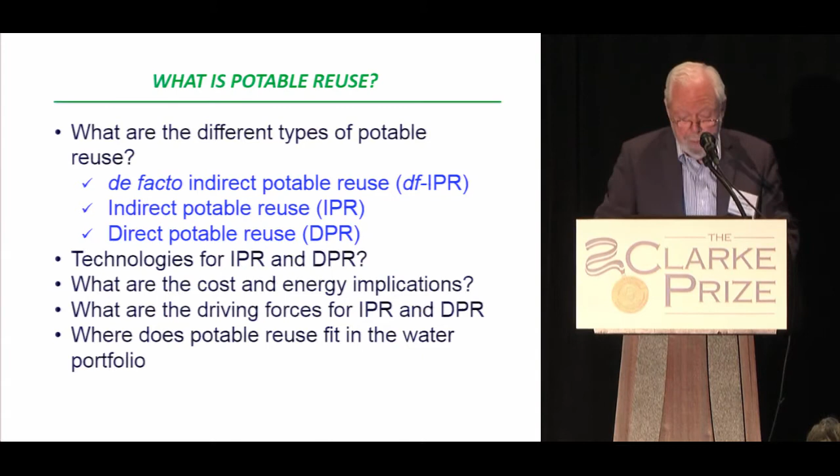And right now, there are really 3 different types of potable reuse: de facto indirect potable reuse, indirect potable reuse, and direct. And then we'll talk a little about the technologies, some energy and cost implications, and some driving forces. Now, indirect potable reuse really is this diagram, and Jeff put it up earlier.

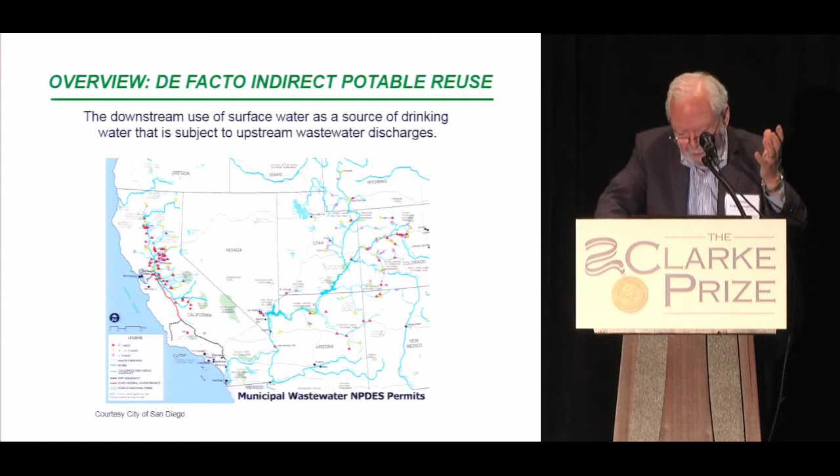And when you think about it, he set the tone for the next 100 years. He absolutely set the tone for the next 100 years. And as you think about drought and reduced flows in rivers, the wastewater is going to become a much larger fraction. And the point is that when the Clean Water Act was passed, it was not passed for this problem, it was to make streams swimmable and fishable. And so we are still suffering from this kind of an approach from 100 years ago.

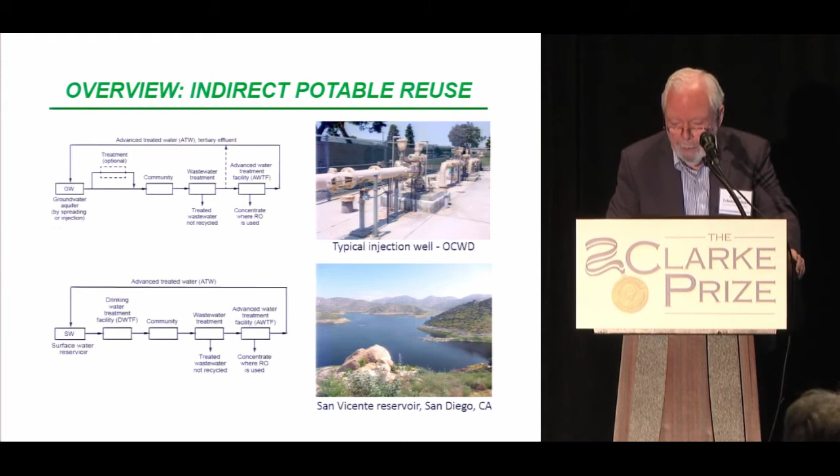So when we talk about direct potable reuse, what are we talking about? We're talking about two types of direct potable reuse. In the first one, advanced treated water is introduced either into a small reservoir or mixing chamber or at the front end of a water treatment plant. And so the concept there is that we're going to introduce it at the front end.

The second type, which people often mistake and want to call tap to tap or pipe to pipe, is one in which the advanced treatment facility is permitted as a drinking water plant. And you see, at this point, no one knows how to do that. In other words, if you have a facility that's producing advanced water and it's also going to produce drinking water, do you separate it by distance? Do you separate it by process? What is it you do? And we really don't know this.

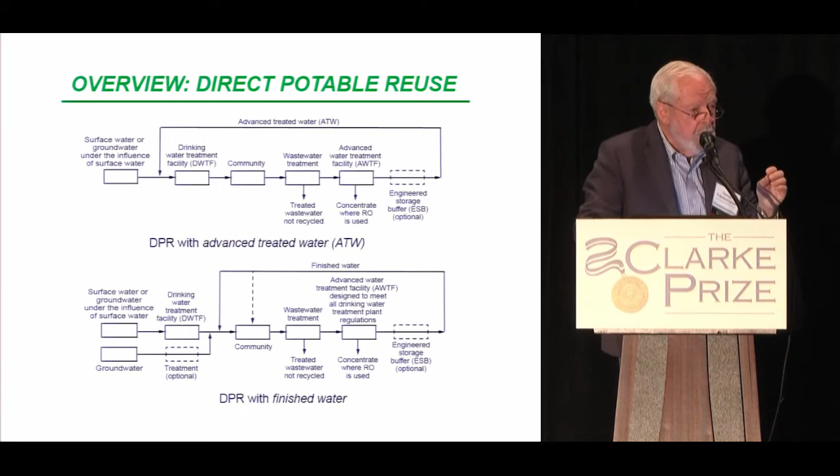And so really the focus of our efforts in the panel were on the upper part. That is where we take advanced treated water and we introduce it at the front end of a water treatment facility. Examples of DPR, Big Spring was mentioned, and Windhoek, Namibia is an example of direct pipe to pipe.

Now, the question that Karen brought up, and it really is a very important one, when you put water into a surface water reservoir, at what volume of surface water reservoir does it become direct potable reuse? In other words, how do you compute that? What do you do? In a proposal that the city of San Diego is submitting, they're talking about additional treatment, both with ozone BAC and disinfection with free chlorine. But again, these are issues that all of you are going to have to deal with.

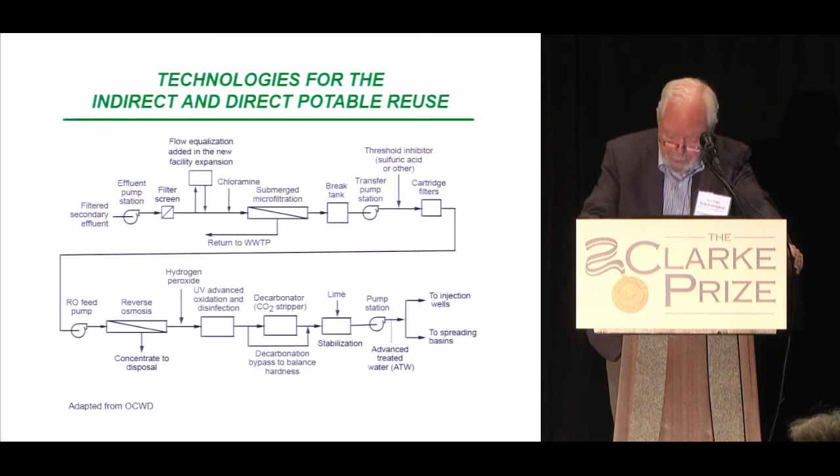If we look at technologies, probably the gold standard for advanced treated water is the Orange County Water District system. And it was put in based on a lot of experimentation over a number of years. And we have submerged microfiltration, reverse osmosis, advanced oxidation, water conditioning. And so there's a lot of concern about how can we do away with reverse osmosis, especially for inland locations. And a lot of work is going on there, and in the next 10 years, you will see a variety of new processes come online, which are really rather dramatic.

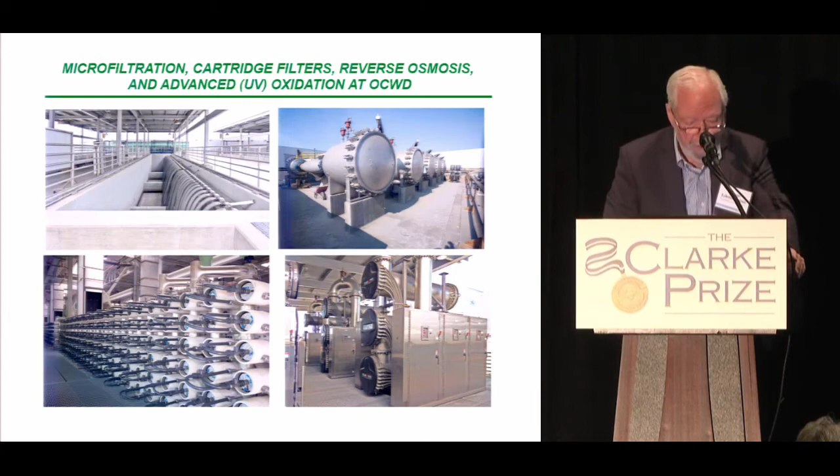If we just look at the facilities themselves, we have in the upper left the microfiltration. We have the cartridge filters on the upper right. Now that's an interesting story. Why do you need cartridge filters if you have microfiltration? Well, the reason is that the chemicals that you buy, the purity is not high enough, and if you don't filter out contaminants, you will damage your membranes. So it's an interesting conundrum, because if you buy pure lab-grade chemicals, the costs are really rather prohibitive. Obviously, we have reverse osmosis and advanced oxidation.

Let's take a look at energy. And we can compare advanced water treatment with, let's say, the energy required to transport water from Northern California. And the amount required to transport the water is larger by a factor of 3, roughly. So all of a sudden, from being a kind of stepchild, this system has become front and center, and it has become cost effective and will become more cost effective in the future.

What are some of the driving forces? Well, from my perspective, the most important one is that water is significantly undervalued now and is going to increase by at least a factor of 3 in the next 5 years. And I see this trend across the country. There are obviously other forces, and we don't need to go into those, but I just wanted to highlight.

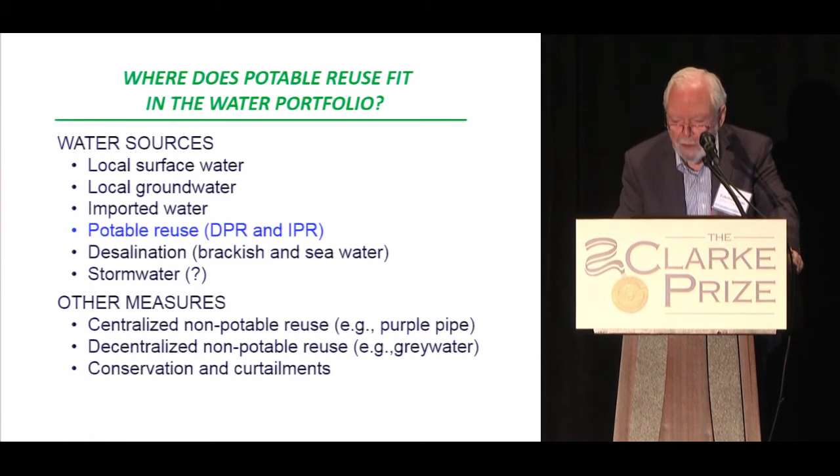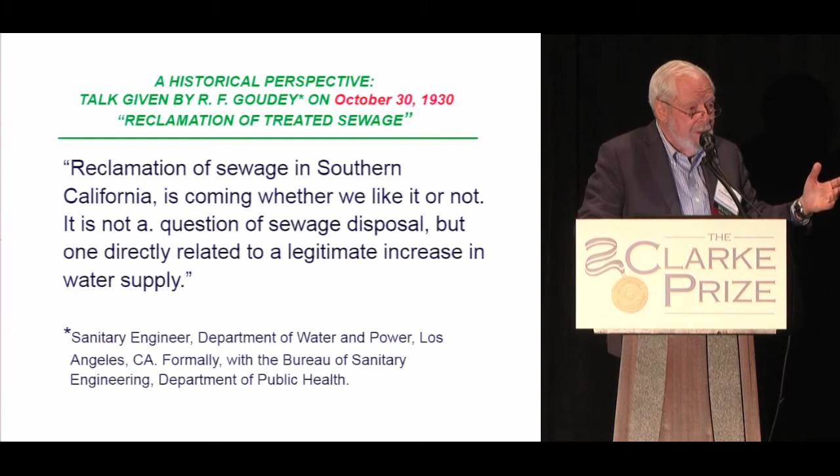So now what I'd like to do is just give you a little historical perspective. This was from a talk given in 1930 in Southern California. Reclamation of sewage in Southern California is coming, whether we like it or not. It is not a question of sewage disposal, but one directly related to a legitimate increase in water supply. Where have we been for the last 80 years? This was 1930. Now, I would like you to read this one because this is a little California angst, but take a read.

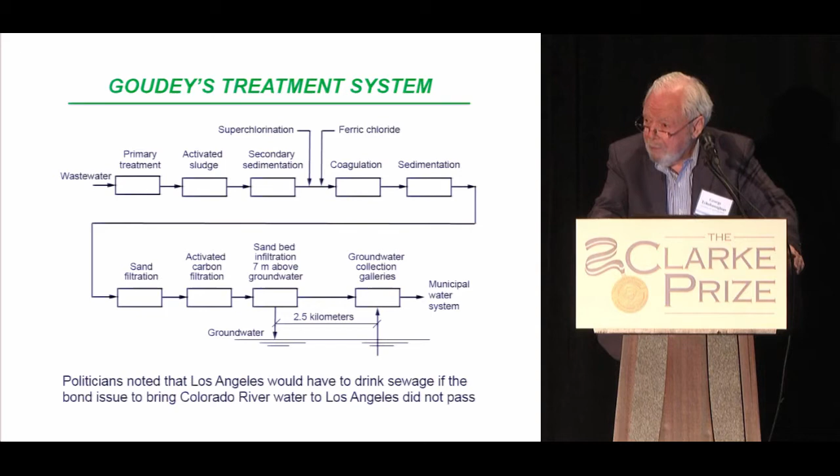You can see that he was concerned. But here's the more interesting thing. Look at the original treatment process he proposed in 1930. It looks very similar to the ones we're now doing, very similar to the ones that we've now implemented. And so the whole idea is that this technology was sitting out there. It was understood, but never implemented. And really, the politicians at that time did it in because they wanted to bring Colorado River water in. And that was what happened to Goudey.

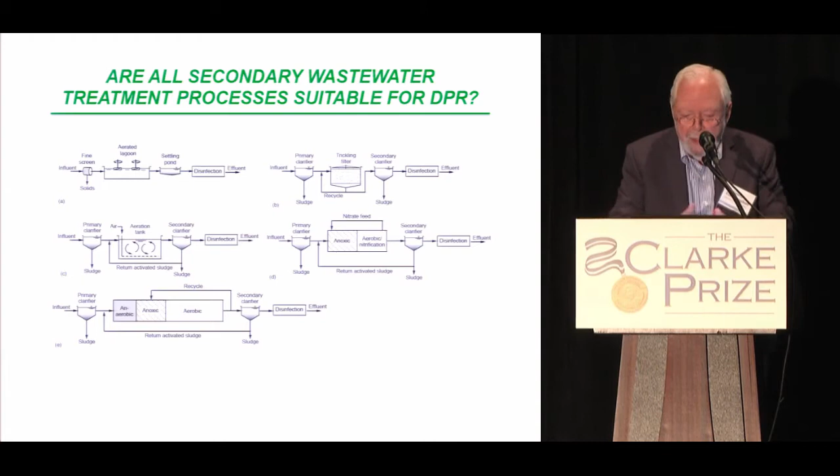Now, some issues that are going to impact both IPR and DPR. The first one is, these are all secondary treatment processes that I've put up. And the important thing is they all meet secondary treatment requirements, but they all produce a different quality of effluent. This chart is not to be read, but we've summarized all these different qualities. And the idea here is that we have to think differently. And here's what I mean by that.

If I asked you, what's the purpose of wastewater treatment? Most of you might say, well, it's to produce an effluent that's suitable for discharge to the environment, whatever that might be. On the other hand, what if I asked the question differently? What if I told you the end point was to produce a water that we could process further with membrane technology? How would you design your treatment process? It would look different. And you're going to hear about a couple of different options in the following session. But the point that I'm making is that we need to rethink wastewater treatment.

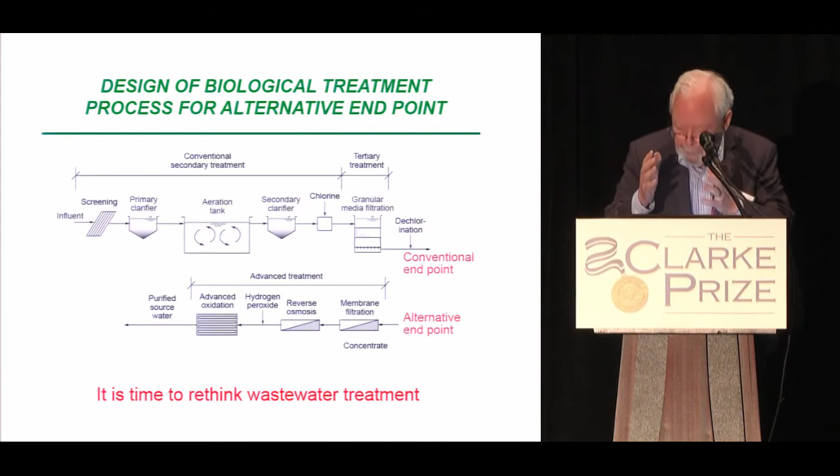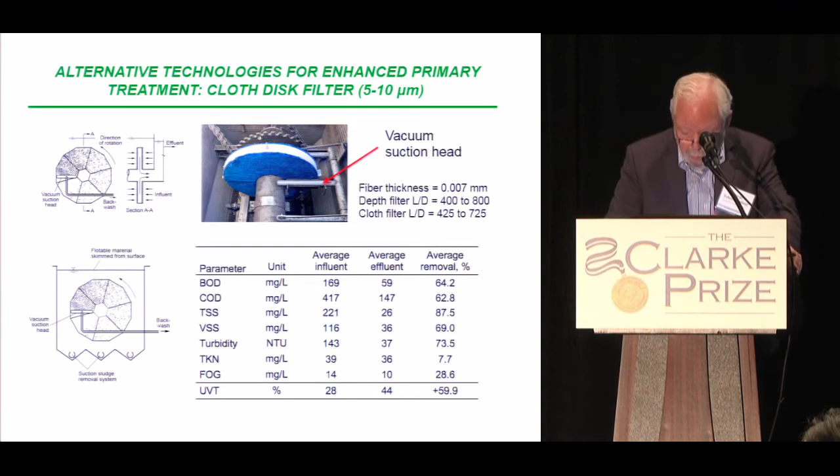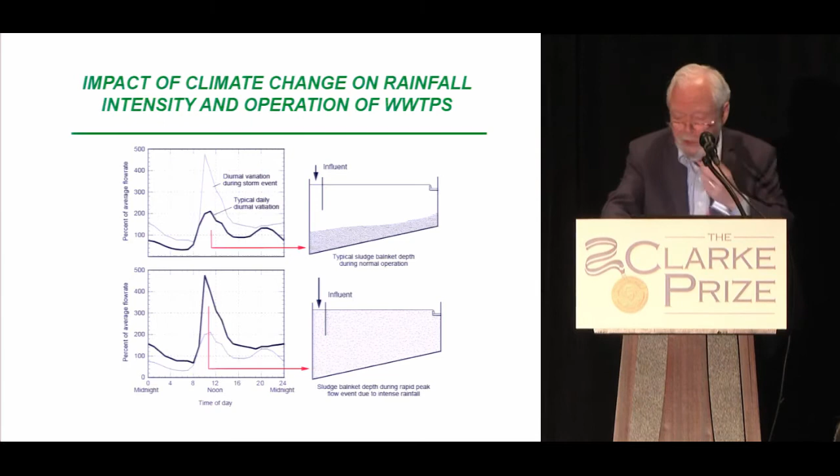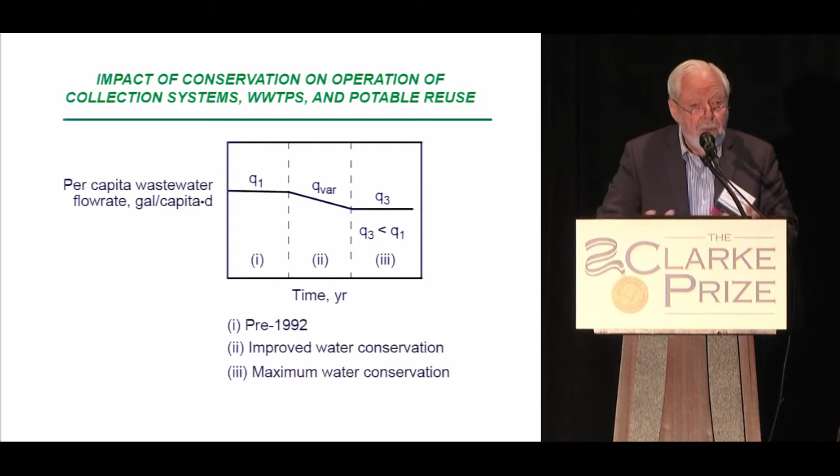Now, the next thing is impact of conservation. If we start at the upper left, up until about 1992, the per capita usage was relatively constant in any municipality. Obviously, it went up and down depending on where you were in the country. But in 1992, conservation started to kick in. Now, there's another dashed line there. We don't know when we're going to reach that. The reason is, how many washing machines are out there with 30-gallon tubs? In 10 years, there won't be any. The water use is going to drop. Now, this is going to have dramatic implications on a variety of things. Across the country, this is what the picture looks like.

Now, the interesting thing is, when that number drops down to 30, gray water systems don't begin to make sense. It's a kind of unintended consequence. Everyone wants gray water systems to work. But when you drop the water level that low, given what you use and so forth, they don't begin to make sense. And that's a problem.

Another problem is that when we drop the water use that low, we get deposition of solids. And what we're finding is that we're getting hydrogen sulfide produced. And the hydrogen sulfide is transported by the skin friction of the water that moves around the solids. It's going down, and the rates of corrosion in many parts of the country have increased by a factor of 8.

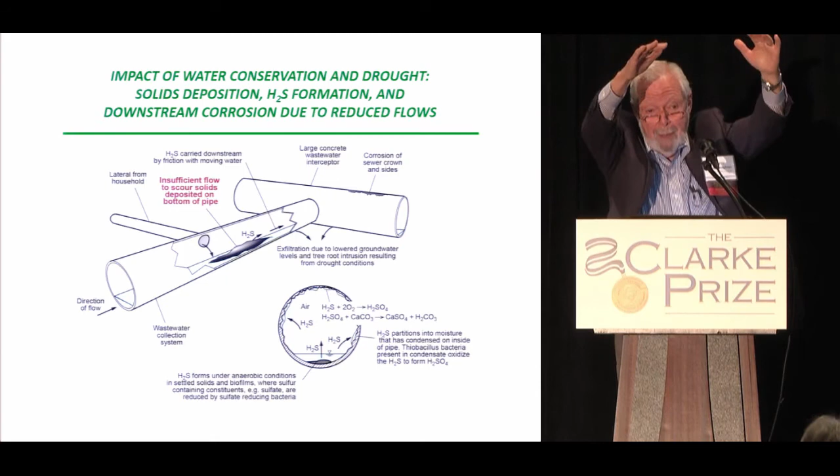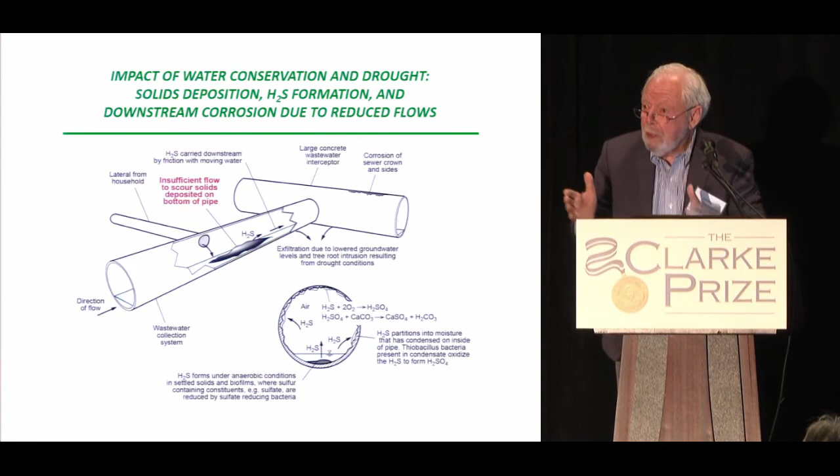So if you're up high in the mountains, the pipes are about this big around, and when you're on the coast, they're this big around. There's no dilution water. So you have to now put in a pipeline to go find dilution water.

Also, another interesting phenomenon is that there is about 30% excess tankage capacity available across the United States. Now, it's not uniformly distributed, but because of these reduced flows, we have all this available tankage. And so the opportunity for rethinking the way we do wastewater treatment and the way we manage storm events is rather remarkable.

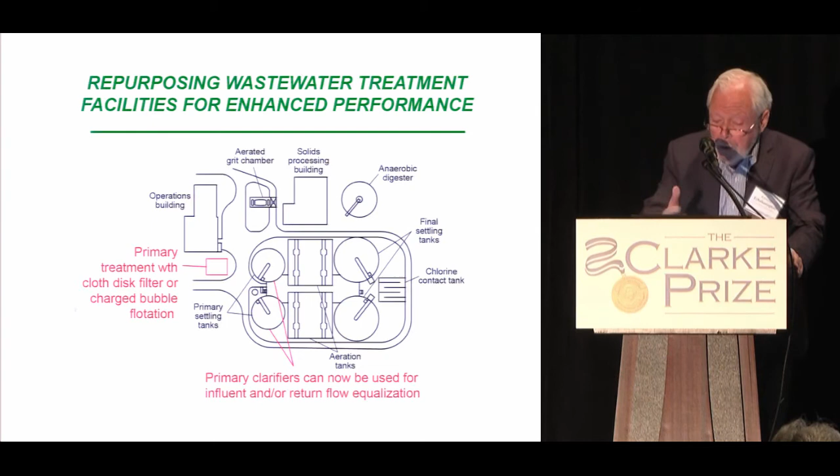As an example, I showed you that cloth filter. It takes about 1/5 the space of conventional primary clarifiers. So if we replace that, we could now use the clarifier capacity for flow equalization, return flow equalization, a variety of different concepts. And so you have to be bold in your thinking in terms of what can we do? Can we apply some new technology? And if we apply it, what are the possibilities?

All right, just a few words about the future. And from my perspective, I think it's important that we move ahead with DPR now. We really do have, I feel, the public health concerns under control. We have the treatment technology under control. But in the framework document, a number of needs were identified that would enhance what we do, because we need to improve what we do. And they were regulatory, technology, and public outreach.

So after treatment, if you were pipe to pipe, you'd tell all the residents you have to change your plumbing. The taps will now read hot and tepid. So when you open your water, how are you going to feel about this water that's sort of lukewarm?

Well, so what does this mean? Well, this means we're going to have cooling towers. We're going to have a lot of different technologies. This is not the same old picture that we've always been looking at.

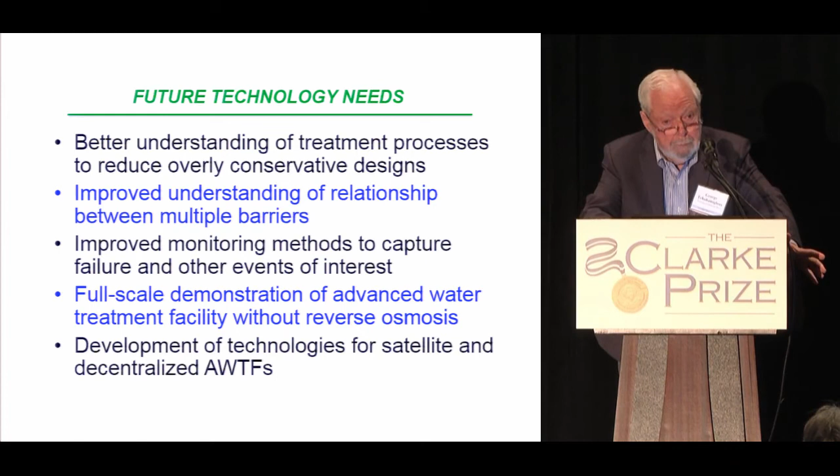Now, the other thing that's truly exciting is, just at this conference, I ran into two people that are developing new membranes. The change you will see in membranes will be astonishing. And in fact, this is heresy, but I'll say it anyway, you could imagine the day where we don't use biological treatment. You don't seem convinced, but

from a public outreach standpoint, what do we need to do? We need to develop appropriate and consistent terminology so that when we talk to each other, I understand what you're saying and you understand what I'm saying.

Along with that then comes another question, and especially for the young people in the audience that are going to design these systems, and that is, what is the optimal use of the carbon in wastewater? What is the optimal use of the carbon in wastewater? Is it nutrient recovery? Is it product recovery? Is it energy recovery? We're going to have to rethink all these things.

And it's not going to be one model fits all. We're going to have a variety of different technologies. But these two things are really going to change the 21st century.